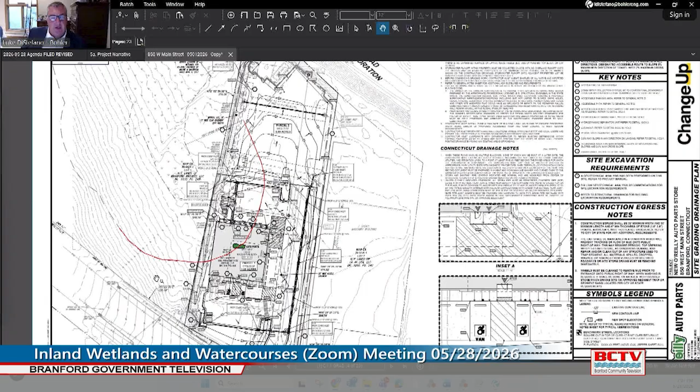That's helpful, thank you. You're welcome. So the back half will be ultimately redeveloped at a later date, but right now we're here because a portion of the site lies within the 100-foot upland buffer associated with some wetlands located in the northwest corner. You can see we have the wetlands identified here, and the red line is the portion of the site that sits within the 100-foot upland buffer. The site, as I mentioned, is basically 100% developed today. There is also a cell tower located in the back portion of the site, that's existing. We're not proposing any modifications to the cell tower located in this portion of the site.

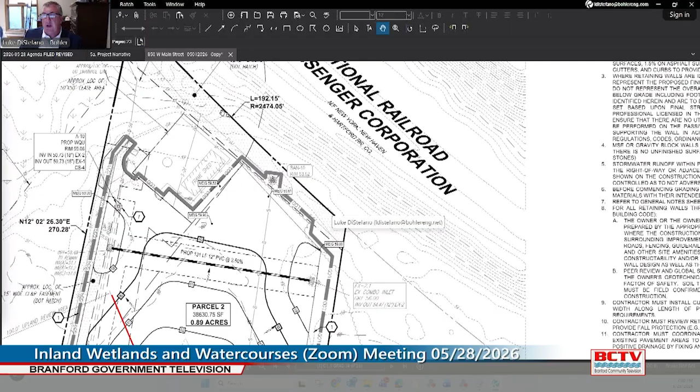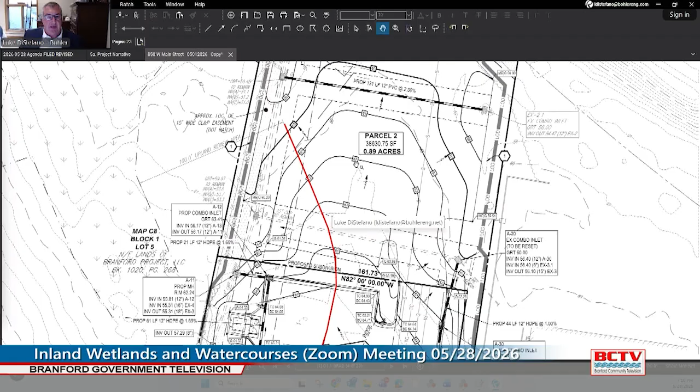As part of this plan, if you've had an opportunity to review the application, we feel we're making improvements to the site that will enhance the wetland under the post-developed condition. We're increasing green space overall when you compare existing and proposed impervious cover. There'll be an overall increase in green space. Most importantly, we're enhancing the stormwater management system on the property. Right now there's a little bit of stormwater quality and management happening, but we're collecting runoff from all impervious portions of the property via deep sump catch basins, conveyed to a proprietary stormwater quality unit before ultimately being discharged back to the wetland, similar to how it is under the existing condition. We've done soil testing and identified D-type soils, so the soils on the site aren't conducive to any type of real infiltration, but we are looking to improve the site to the greatest extent possible.

Again, we're in front of this commission because we are doing work, about 18,000 square feet of work on the 2-acre site will occur within the 100-foot buffer, and that is why we're in front of the commission this evening. So with that, I know you guys have a pretty full agenda, I'll open it up to comments from the commission. We did receive some comments earlier from town staff, none of which we think are major or insurmountable. We also have a meeting set up with the Planning and Zoning Commission happening next month, so there are some additional reviews that will take place in connection with the project, but your commission was the first stop.

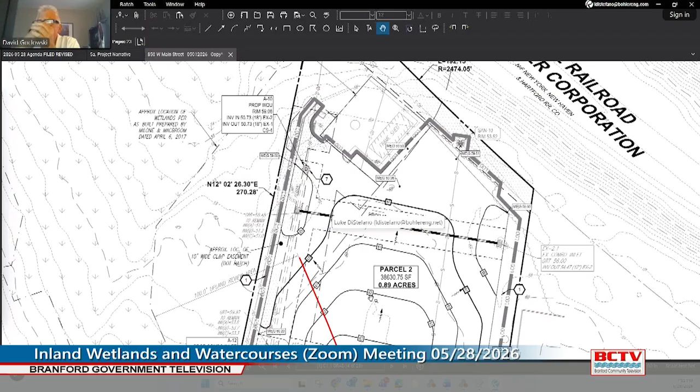Again, I'm certainly happy to answer any questions the commission or anyone on the Zoom call may have. Thank you. Good evening, Mr. DiStefano, Commissioner Goklowski here. I'm under the impression you're going to be removing the existing structure on the property? Correct, everything on site will be, with the exception of the cell tower, razed and removed. Okay, I'm very familiar with the history of this parcel, and there were some sewage issues, piping and sewer issues at one time when they were in operation.

Are you going to be removing the old plumbing that is currently on that structure, or what's the plan? Correct, that'll be removed, new sewer line installed. Okay, all right, thank you. You're welcome.

This is Commissioner Bassermann. Can you go over the construction activities for the removal of the facility that Commissioner Goklowski mentioned, and what protections are going to be employed to protect the wetlands during this removal?

I can't speak specifically to the demolition practices, that's means and methods, but it'll be a typical demolition by a licensed contractor. We have a soil erosion and sediment control plan submitted with the application, so we'll have safeguards in place to prevent sediment migration, erosion, or pollution making its way into the wetland during construction. There's also a long-term operation and maintenance plan for ongoing maintenance once construction is completed and the site's in operation. We're taking all necessary precautions to protect the wetland, and I think we're taking steps to ultimately enhance the overall condition of the offsite wetlands should this construction take place.

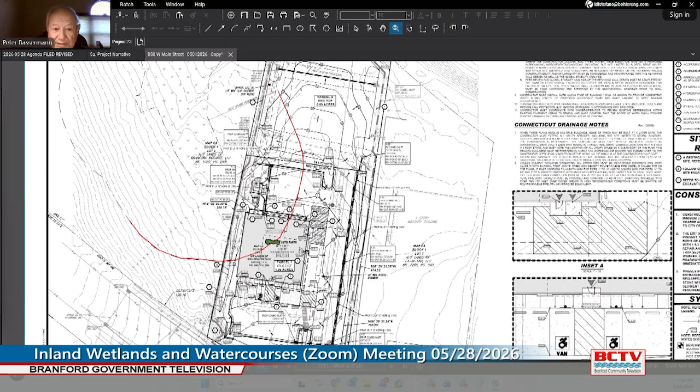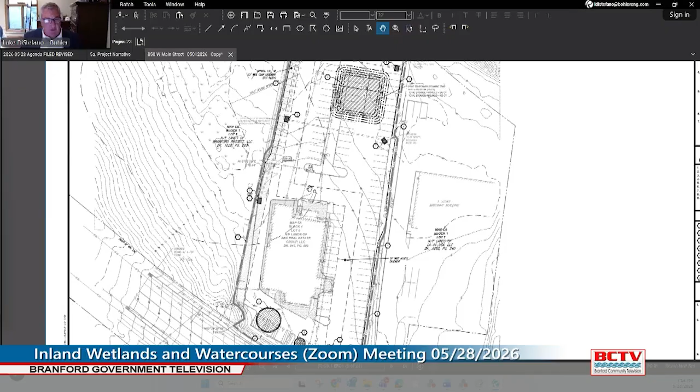I'd like to see those soil and erosion controls in whatever sketch you have of that. So this is the plan here. If you've had an opportunity to review it, you can see we have erosion control barriers around the down gradient portions of the property. We have temporary sediment basins, soil erosion control around the catch basins, and stockpile areas. So it's all the standard soil erosion and sediment control measures we typically employ for any project of this nature.

This is Commissioner Goklowski. You said you're splitting up the property, so what are you going to make it, 3 parcels or 2 parcels? Two parcels. And what are the plans for the second parcel? It'll be developed at some point, but right now I can't speak to that. We're only here for the O'Reilly piece, but my guess is it'll be developed at some point. Do you have any idea what the plans are for that particular piece? I do not at this point.

No. Okay. All right. Jamie, Frederick. Oh, sorry, go ahead, Jamie.

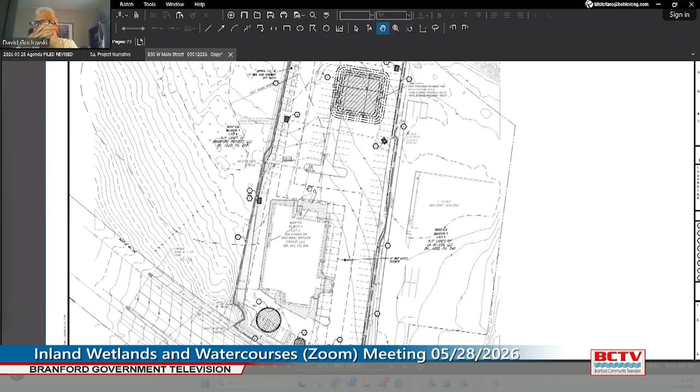That breaks down. So I had a quick follow-up question regarding the rear parcel. I believe as part of this proposal, it's proposed to be crushed stone or gravel, and there will be some catch basins installed in the rear. So I was curious as to what that would look like from a durability of the catch basin frames standpoint, and also from preventing stone from entering the system.

It'll be typical, it's possible that post-construction, if it's left as a gravel-based area prior to being redeveloped, like with any catch basin, there's a possibility of stone, but with the deep sump, 4-foot sumps in the various catch basins, and a long-term operation and maintenance plan as I mentioned, those will be monitored just like any catch basin would on any active site. If it's identified that they're full or collecting any type of debris or sediment, they'll be cleaned as needed. So that's similar to any type of long-term operation and maintenance.

Jamie Frederick, the Wetland Agent, just to follow up on that, I know, just for clarification for the commission, the town engineer did get review comments in on this application that were distributed to the applicant today. I was not able to draft a staff report. Olivia put a lot of legwork into starting one, but I didn't feel it was as comprehensive as I typically like a staff report to be before releasing it to the commission. So I am asking some of my questions on the fly here. But I wanted to backtrack.

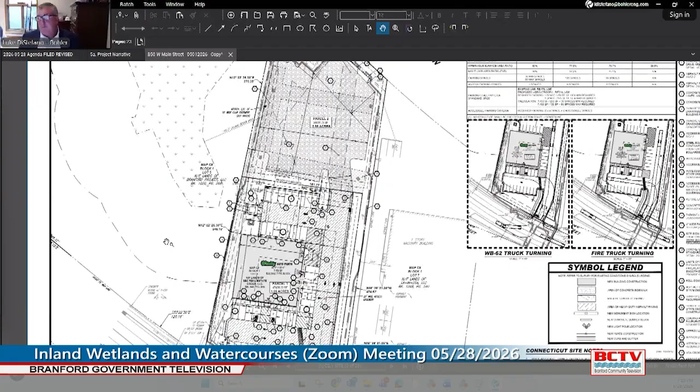I guess I'd like to see that visually. So if it's on this plan, can you blow it up a little more? It is. Again, it's going to be difficult to see. Let me see if I can.

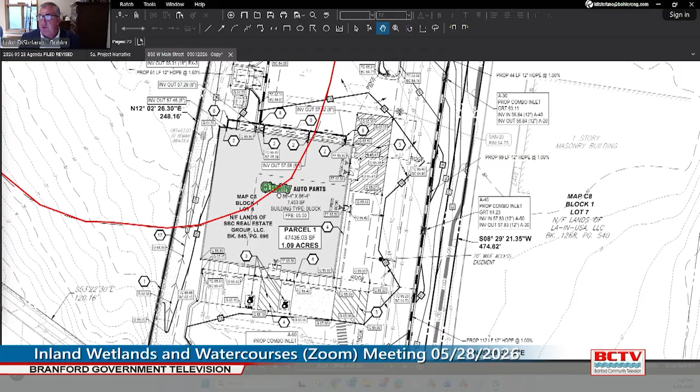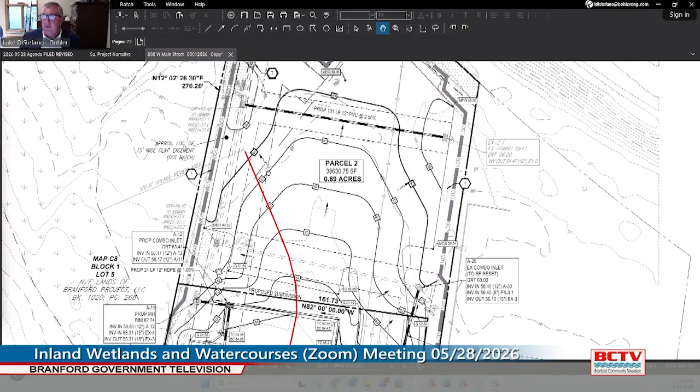We don't always show the actual catch basins, but you can see right here what we've done. This may differ slightly from what's ultimately constructed in the field, but you can see all the runoff from the roof is directed into a series of downspouts on the north side of the building. That'll be collected and conveyed into the stormwater management system here prior to making its way southerly into the water quality unit and then ultimately back into the wetlands. So even though the runoff from the roof is, quote, clean runoff, it'd still be pre-treated like runoff from the other impervious portions of the property will be. So it's another safeguard over the existing condition.

This is Commissioner Bassermann. I'm a little concerned with the comment that what gets done in the field may be different than the plan. All I mean is the roof sometimes changes. The architect may change where the downspouts are on the roof, but we will still collect 100% of the roof runoff and treat it the exact same way. Visually, we're showing it with 4 downspouts on the north side of the building, which we believe to be how it will ultimately be constructed. But it's possible that between now and when they build that building, the roofline could change, the gutter locations may change, but it doesn't change the intent of the stormwater design and how all runoff that hits that roof will ultimately be treated prior to being discharged into the wetland.

This is Commissioner Goklowski again. You said you're going to improve the impervious conditions on the property. What are you going to do with the second parcel? Are you including your plans for the second parcel, or are you just concentrating on the parcel that is going to be developed at this time?

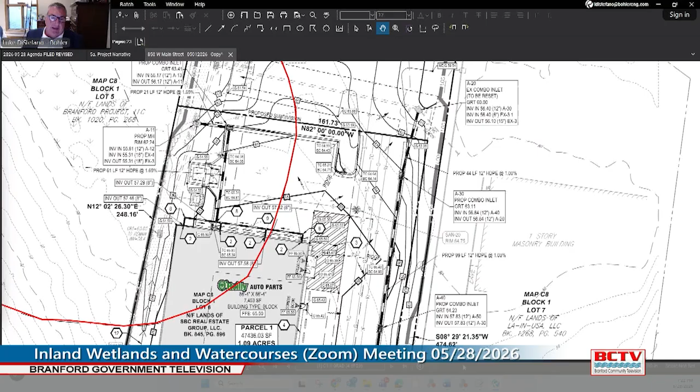Commissioner Bassermann: Is there any stockpiling on the site? I'm sorry, could you repeat that, sir? Is there any stockpiling on the site? Again, we showed some areas on the sediment and erosion control plan for potential stockpile. That's going to be up to the contractor, more of a means and methods thing than anything else. But we did show area for stockpile right here, surrounded by erosion and sediment control fabric, so that if they do stockpile, it's similar to any other construction site. It'll be monitored and done in such a way that it prohibits any type of soil migration or sediment movement offsite.

This is Commissioner Bergman. You're going to take up a lot of old asphalt. Can you speak to where that will be, whether it's going to be stockpiled or brought off immediately, where it'll be stockpiled, et cetera? Again, that's a construction means and methods thing, up to the contractor chosen to demolish the site. In other locations like this, it's taken off-site unless it can be reused as fill or structural fill. Generally that type of material is taken off-site to an approved disposal facility and disposed of according to all federal, state, and local regulations. But again, that's something the contractor will deal with once a contractor is chosen for the project.

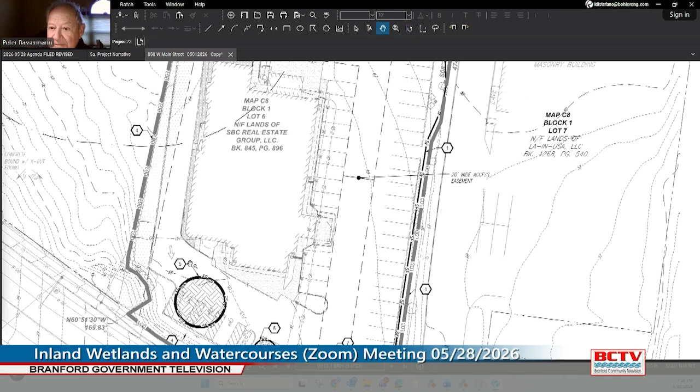This is Commissioner Bassermann. In other applications this commission has reviewed, that degree of specificity has been provided, even though we're operating with the same Connecticut rules and regulations for those contractors. I'd love to be able to speak to other applications and applicants, but I don't know if those applicants had contractors already chosen, or preferred contractors that do all their work. There's a lot of variables.

I've been designing and permitting sites in New England for 31 years, and in 99% of instances, this level of detail on plans is more than enough, whether it be inland wetlands, or planning and zoning boards of appeal. We're not looking to dodge the question. I'm just telling you at this point in time we don't have that information, but we're happy to provide it when we can.

Jamie Frederick, the wetland agent: I'll speak to that point. I think the main concern the commission has relative to stockpiling is the extent of stockpiling on site. Oftentimes plans will initially come with a small circle, and then the site development comes and it's a much larger stockpiling area. So the main concern is whether the stockpiling area is appropriate for what's likely to be stockpiled on site. The other question is whether asphalt millings will be stored on site, because oftentimes the commission will want to see that covered to help reduce leaching of chemicals from the increased surface area of the millings.

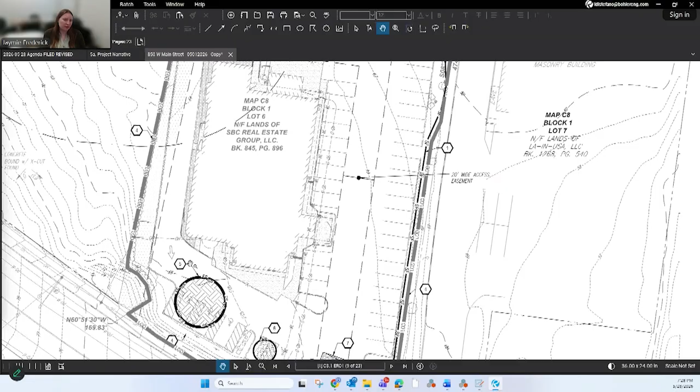The main thing for consideration is making sure the stockpile doesn't move in proximity from where it was proposed on the site plan to the wetland, and that we don't end up with stockpiles on top of catch basins, which ultimately drain into a stormwater system that goes to a wetland area. So those are the concerns the commission's looking to address.

My computer's not behaving here, but I can tell you when we lay these things out, we put the stockpile as far away from the wetland buffer as we could. We also have to remember this is a very small property being redeveloped. It's currently 100% developed today. We are not modifying grading and drainage to any great extent, so we don't anticipate huge stockpile areas on site.

This isn't an undeveloped site where we're coming in and cutting into huge slopes. We also have a site that's very tight for everything that's going to be happening. When you consider there's going to be construction equipment, they're putting in a building, there's not a lot of room to maneuver. So we placed the soil stockpile area where, in our opinion, it's as far away from the wetlands as it can be, and in an area conducive for the contractor so it doesn't interfere with other construction activities or equipment on site.

But again, we're certainly happy if there are certain requirements the commission would like to see, such as some type of material underneath any stockpile, or additional provisions beyond what we already show on the soil erosion and sediment control plan. We are more than agreeable to having those added to any type of condition or decision the commission sees fit to offer this evening or at any appropriate point.

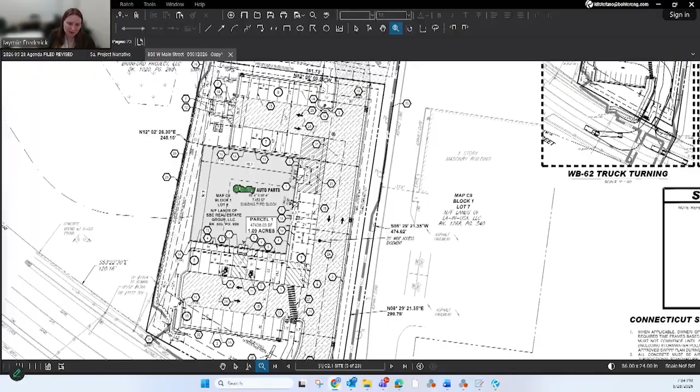So, this is Commissioner Bassermann. It sounds like it's not ready for prime time at this point. It needs to be reviewed both by wetlands and by planning and zoning, and you're kind of wearing both hats these days. So I'm going to make a motion that we table 26-16. Before you do that, Peter - yes, can I interrupt you and stop you? I just want to point one thing out and see if any commissioners have other questions, so that if we continue this, hopefully everything is ready to go at the next meeting and the applicant can move forward and not be held up. I want to point out a couple things, and also give the applicant a moment to address any follow-ups before we continue.

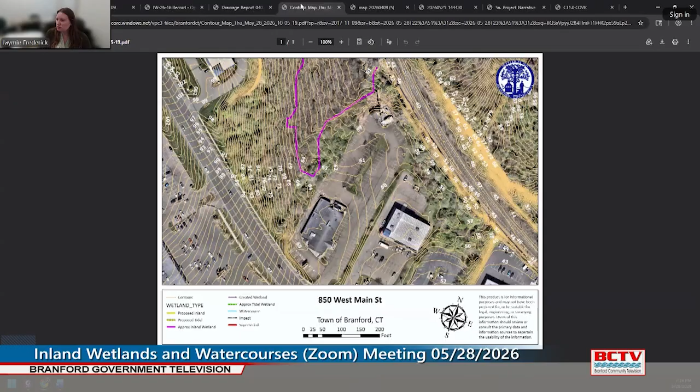It does look like the wetland might be a little bit more extensive. Again, it appears to be mostly offsite. I'm not entirely sure if there's a little bit of wetland area that perhaps extends onto the subject site. Presence of phragmites is not a wetland indicator, but the plant does tend to grow in wet areas.

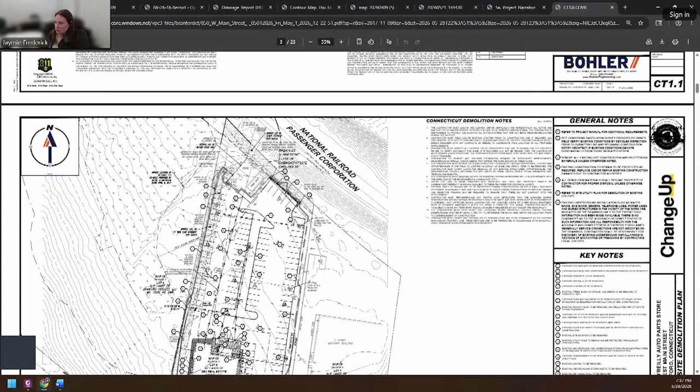Commissioner Besson: Jamie, that last picture, how close is that offsite area to the property line? Jamie: Honestly, I'm not entirely sure. But this catch basin here... Commissioner: is this catch basin here? Jamie: Oh, okay.

I will note that when I was out there, there's a very small portion of this lawn that seems like it would be graded to potentially flow to this catch basin, and the rest of it is graded away from the subject site. That's shown in the watershed calculations.

Any questions on any of that from commissioners?

Commissioner Bassermann: Would it be your intent, Jamie, to put those questions and comments into a document and forward it to the applicant so it can be reviewed for the next meeting? Jamie: Certainly, we'll follow up with the applicant. I'd also like to provide them the opportunity to see if they have any comments or questions while we're all together.

Commissioner Begman: I like the idea of the project coming back when the contractor is known, so we can be told what the erosion and sediment controls specifically would be. And I had a question: is there a provision for where in the paved parking areas the snow removal will go, and where the snow piles are going to be piled?

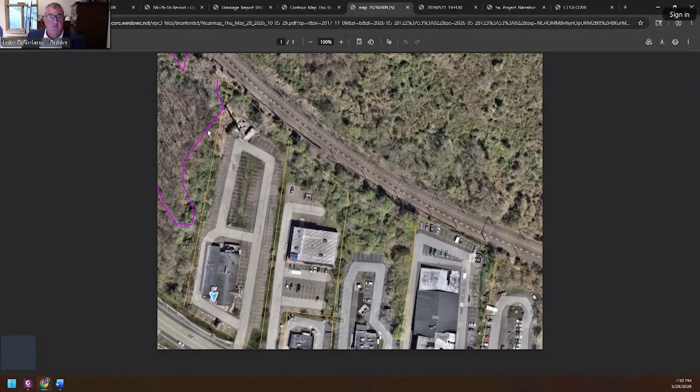It's a question for the applicant. I believe the snow storage areas were shown on site, but I'll make certain that when we come back they will be, if they are not. Generally they'll be in landscaped areas as far removed from the wetland as we can.

I can't guarantee that unless it's a specific requirement by the commission that there be no snow storage within the buffer, in which case we'd keep it entirely outside. But generally it's going to be in landscaped portions of the property around the perimeter. In instances with tighter sites like this, if the commission deemed fit, we have in the past agreed to have snow removed entirely from properties during heavier storm events, but traditionally we're able to find plenty of room to mitigate snow and keep the site operational.

I would, however, ask about the comment you made relative to coming back once a contractor is chosen. I'd prefer not to have that as a condition because we don't know when a contractor will be chosen, depending on permitting and funding timelines. But despite a contractor being chosen, if there are specific issues the commission wants to see, or specific items put on a plan or conditions in any approval, we're happy to deal with that. It's not something we're looking to shy away from, it's just something I can't provide right now.

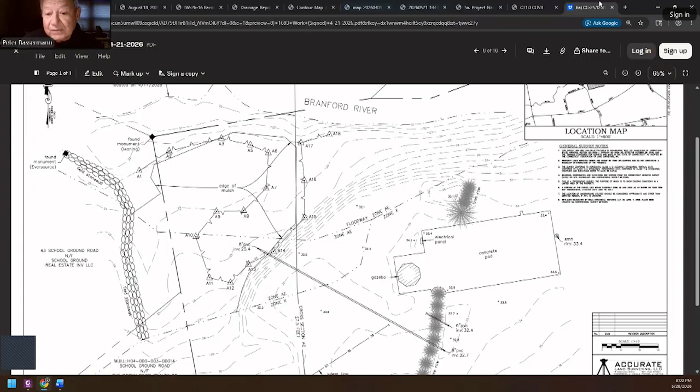Good evening, Edward Schenkel for the applicant, 509 Branford LLC. I'm here with Mr. Stephen Trinkus, our professional engineer, and Mr. Foss, our LEP, also here and available for questions.

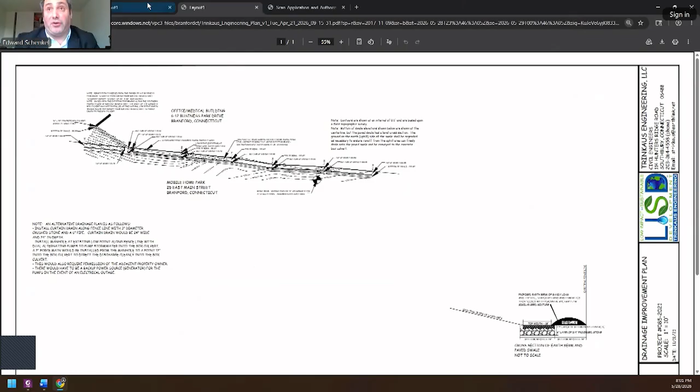I'll speak quickly and then turn it over to Mr. Trinkus. I can represent that I've spoken to Attorney Deacon, counsel for the co-applicant, 6-12 Business Park Drive, Branford. He stated that Mr. Brown and Mr. Clutch are not pursuing the concerns they raised before and will not be attending the meeting tonight, which they are not. I can represent that to the commission. To the extent Mr. Brown's comments need to be addressed, I'll turn it over to Mr. Trinkus, who can talk about that and answer other questions for the commission, and then I'd like a few closing remarks as well.

Sounds like a plan. Okay. Steve Trinkus, for the record, professional engineer from Southbury.

A lot of Mr. Brown's comments dealt with the stuff on the Clutch property. He asked at the meeting whether we could infiltrate water farther up on the site. Our LEP provided a map to staff showing the extent of the impermeable liner above the questionable environmental fill that was used here. But you just can't infiltrate on this site, even above the liner, which goes about halfway up into that field.

When we did the site walk, we parked on the lower driveway, and looking uphill at that lawn area, the liner appears to go about halfway up between the roadway and the units on the north side. But even if water infiltrated above that, it would go underneath the liner and into that contaminated fill, which is what you don't want.

When I was on the site a couple of years ago, these lawn areas, while they are lawn, the soils are also very compact — pretty much almost one step away from being pavement, so rainfall just runs off of them. It's not infiltrating.

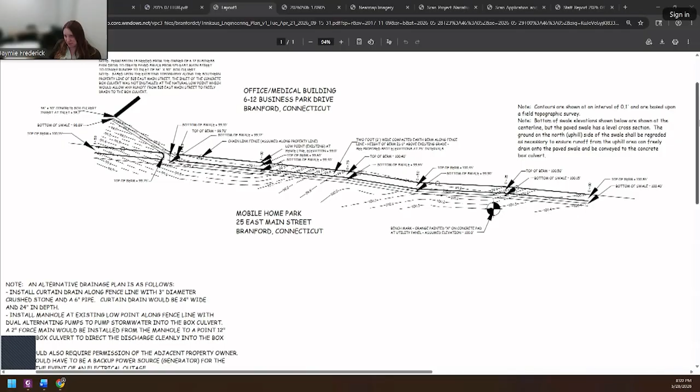Jaymie Frederick, the Wetland agent. I think we could address that through a condition of approval, potentially, especially since we got a verbal response. We could get something written and added to the plan.

Sorry, someone, I think Mr. Trinkus is getting frozen periodically. Would want to, but I apologize, I guess my computer's not happy being on all day.

But the maintenance would be basically mowing it twice a year, about midsummer and then late October. Not mowing it, but weed whacking it. So anything that grows up like a foot, just weed whacking it down to about 6 inches, and that can easily be added to the plan as a condition of approval. But that's the only maintenance we'd have to do.

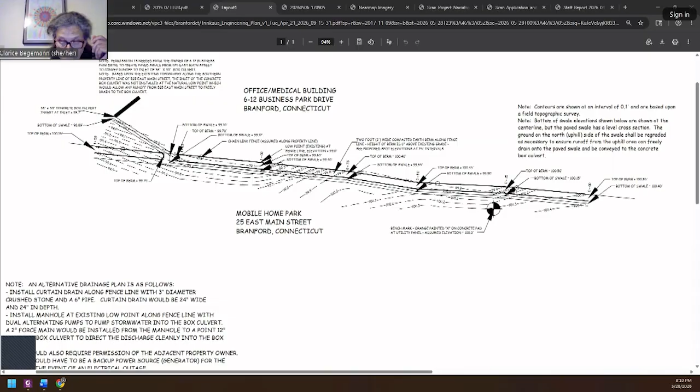Jaymie, this is Commissioner Begemann, do you have a staff report for this?

I believe we went over the staff report at a previous meeting and continued for the site walk, so I'll skip over that. I think the other thing of note is the erosion controls and how they'll protect the box culvert during the construction of the swale and associated berm.

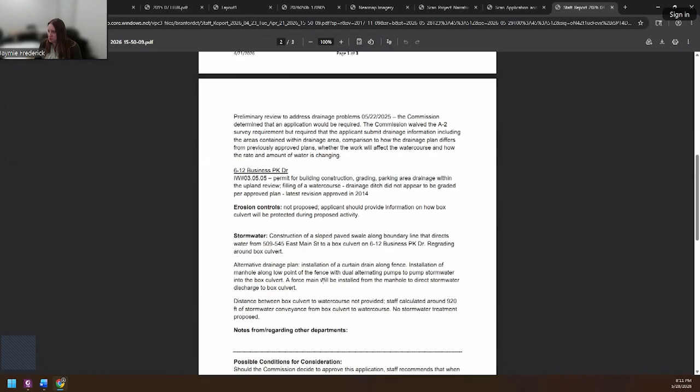The outlined recommendations in the staff report are required inspections for the stormwater drainage structure installation and final installation, or final inspection, which probably happen at the same time, standard conditions and general provisions in the issuance of all permits. I think based on the discussion this evening, the commission might want to also add a condition such as maintenance details as outlined at the May 28, 2026 meeting by the project engineer shall be added to the site plan.

And I don't know if you want to have the engineer talk to it. I know there was some discussion at the last meeting where this was discussed, but again, refresh the commission on how the box culvert will be protected, if there are any measures that should be installed, and what that would look like relative to the plan as well.

This is Commissioner Bassermann, who does that maintenance? Who does that weed whacking? The maintenance would be done by the property owner.

And if I can address the erosion control, I thought we may have discussed it on the field. We'll put a 9-inch Filtrexx sock across the opening of the box culvert, right at that opening, so that as we do the slight excavation, put the gravel in. Because what will happen is we're going to excavate down for the gravel base, put the gravel in, get it sloped to the box culvert, and then come in and pave it, and then the berm goes in right after that. But we can put a 9-inch Filtrexx compost sock across the opening, and that will prevent any sediment from getting into the box culvert when we do this slight amount of work.

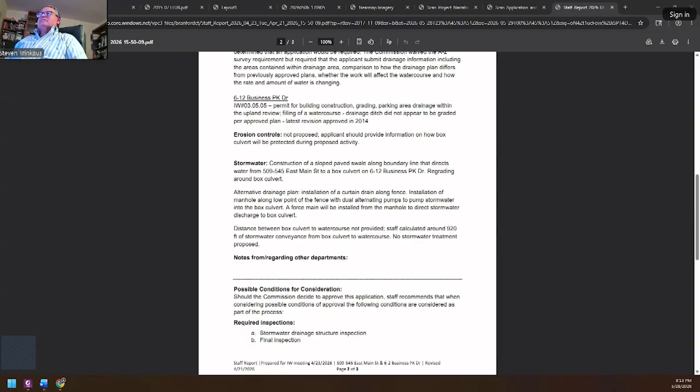This is Commissioner Bassermann. Jamie, do you have the means to add that to this staff report, or is that not capable because it's a different system? It'd be easier for me to have a Word document with the language that we can add to the staff report. I am working on it right now, I think it's almost ready.

Maintenance details as outlined at the May 28th, 2026 meeting, and a 9-inch Filtrexx sock shall be added to the plan at the opening of the culvert.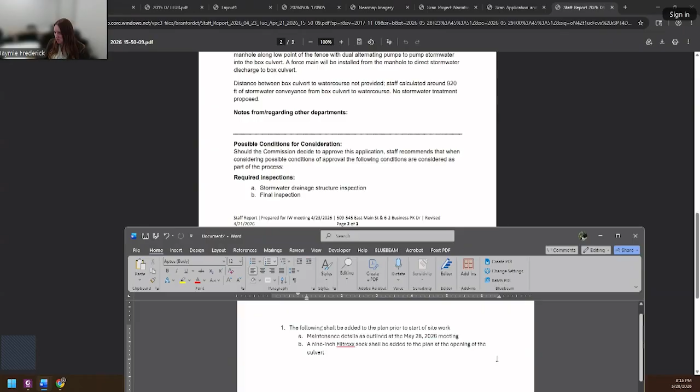So this would be essentially condition number 1, and I can kind of overlay it over the standard conditions that the commission's generally familiar with. I think I spelled the brand name right. I think that covers it, Jaymie.

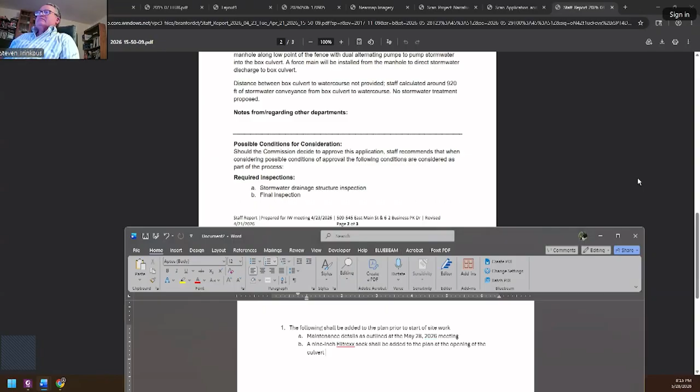This is Commissioner Besserman. So Jaymie, so I understand that this would be under possible conditions for consideration number 1, and then required inspections would be number 2 or something? You know what? Typically, I think based on Olivia, maybe you can help me on this one. I think required inspections might be condition 1 in our new system based on our template. So maybe this would be condition number 2. Do you recall, Olivia, how it's structured?

I think maintenance would be number 1, and then the Filtrexx would be number 2. I mean, do we count the required inspections as a condition? No, okay, unless, no, but I don't know if the commission wants to see a revised version.

Prior to start work and following shall be added to the plan and shall be reviewed and approved by the duly authorized agent. I think that's the information that was presented this evening, so it's just a matter of making sure that it's in order. Sometimes we need an erosion control inspection. I didn't put it there when I was initially drafting it because there were none proposed, so I'm not sure if we want to add that.

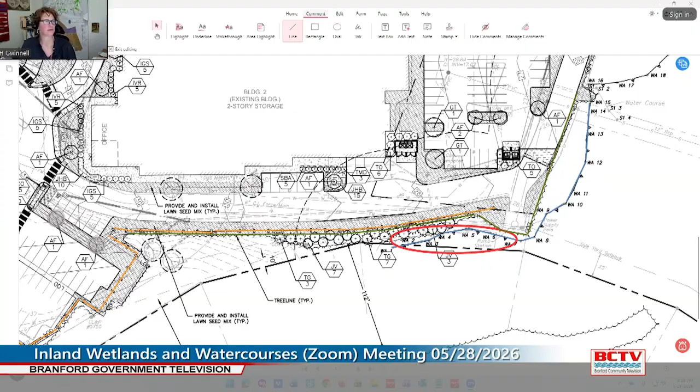Let's see if I can. I'll share my screen. Okay. I'm not great at the screen sharing, but can everybody see this? Yes. Okay, so there was some discussion that some trees needed to be cleared.

Jaymie had conversations with the project manager at the time that the trees would be limbed, and I specifically asked when do you guys have that planned? This was during the winter time, there was still snow on the ground. They were not ready to schedule it at that time. However, I was informed that they would reach out and give me a heads up so I could go and just see the area that they were actually going to clear.

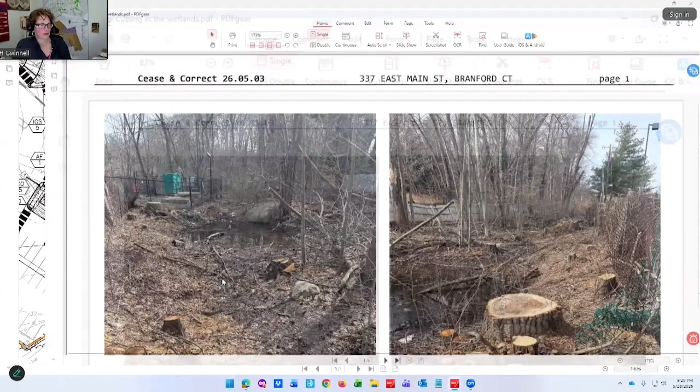Probably a few weeks after that, I hadn't heard anything. I was, again, doing a routine inspection, and when I arrived, this entire area was not just limbed, it had been cleared. So I do have some pictures - this is what I saw when I went after.

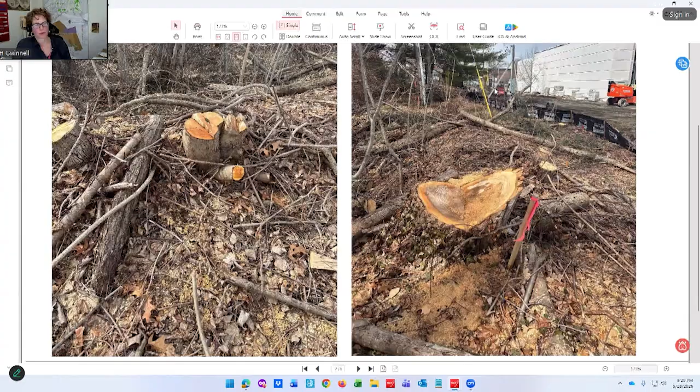This is where the trees had been that we were informed would be limbed. This was the result, and it obviously went deep into the wetland area.

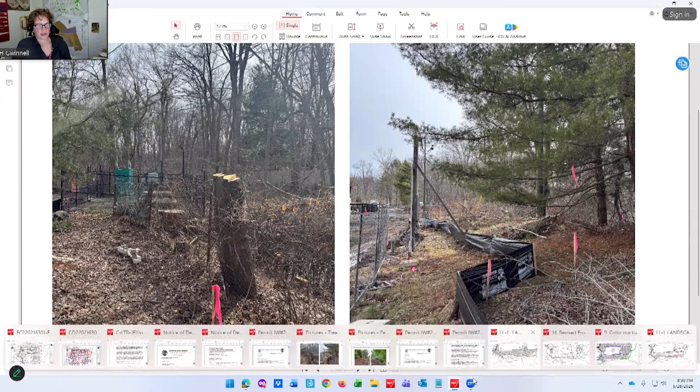I did have conversations with the superintendent on site, the previous one they switched out, the new one, and the different project managers. So everyone was aware that this was something that was going to have to be addressed, and that they would be receiving some kind of a cease and correct order in order to remedy this. The follow-up, what you're seeing now, is slightly different than the previous one.

I think if you can see this, we have the orange line, which is actually a fence. And in the last 4 days, the fence has moved, or has been beginning to be installed. Again, there was a conversation before this sort of went in, saying, why are we putting the fence over here?

So I also would like to bring up to the commission that during this discussion of the wetland area, they also altered the direction of the fence, which you can see pictures of here.

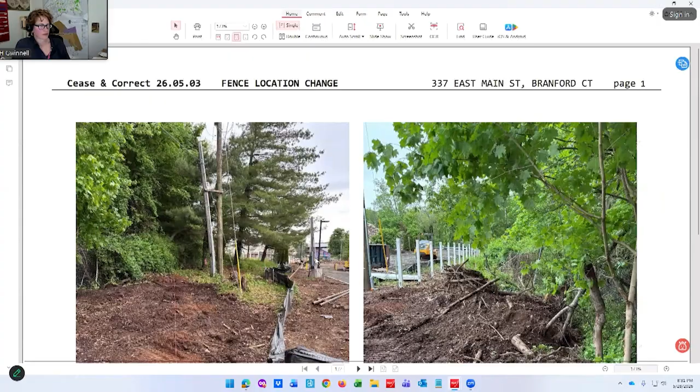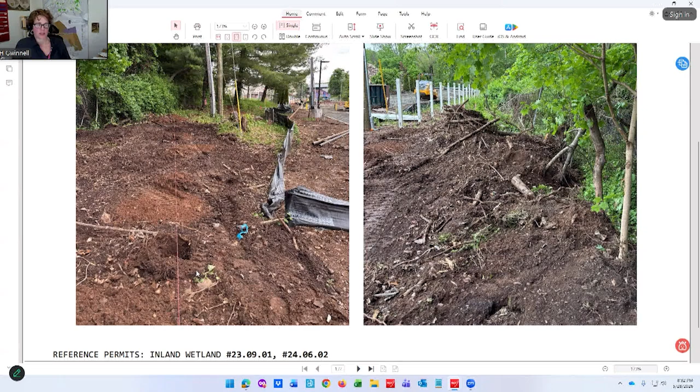So if you can see this pink line, this is from when I went last week, Thursday afternoon, and this had all been cleared back to here. And you can see over here, some of the fence posts had been put in. They were concrete. I did inform them to stop what they were doing, that this had not been requested, no modification had been requested. This plan had not been submitted to install the fence in that configuration.

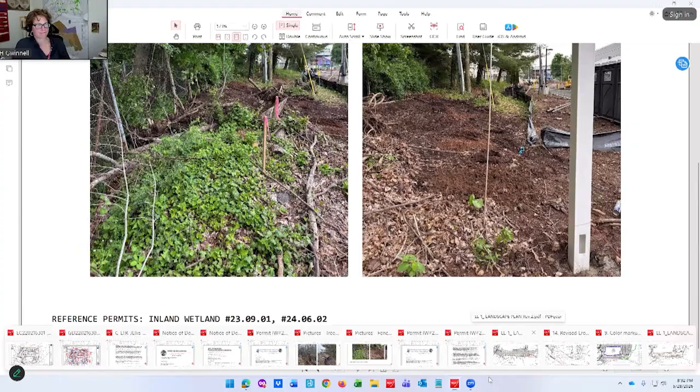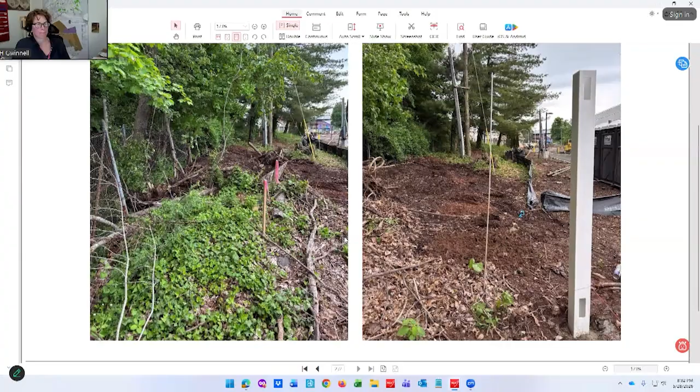Commissioner Basserman: go back to the previous set of pictures. The clearing or the trees? The fence that you had up, the white fence on the right? Yep, the one before this. There you go. But were those posts put in after the issuance of the cease and correct?

No. Because the cease and correct was issued on what, the 3rd? Two days ago. So I had communicated with them that Thursday afternoon that they needed to stop. I had been, last week, in training, so I was not available. I stopped by here on my way home because I know that the site has a lot of activity and we had a tremendous amount of rain. I informed them to stop what they were doing with the fence.

Since then, in this area, the posts had been put in and concrete had been poured around the bases, and some of the paneling, if you can see way back here, you see some of these white posts in the back, the fence has been installed on those. I was there yesterday afternoon, and these posts are now in, but I didn't see any fence paneling up.

Can you go back to this, Commissioner Basserman, can you go back to that site plan that you started with? The original one, this is the current one. I guess I'm looking for where the wetland is, where the delineation is on the wetland.

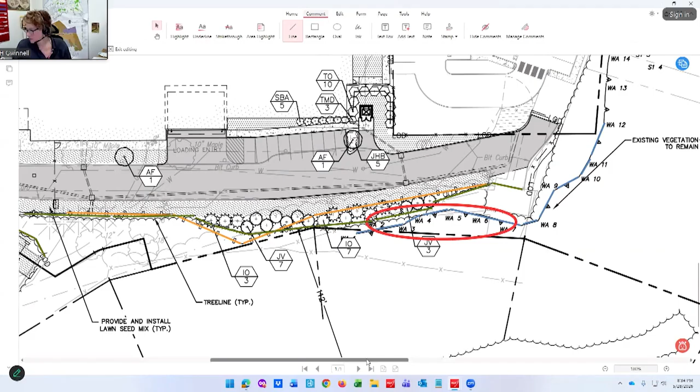Sure. Well, this has not changed. This wetland line has been the same since this was the plan that was approved in the original permit, and this is the landscaping plan that the landscaper actually was working off of, which only came into existence, I believe - I can look at the date - that was February, January of this year, versus the initial permit which was issued in 2024.

Commissioner Basserman: is it wetland 2 that's at the end of that red circle? Yes, that's wetland 2. And wetland 1 is here. Okay, wetland 2 is over here. And it just abruptly stops?

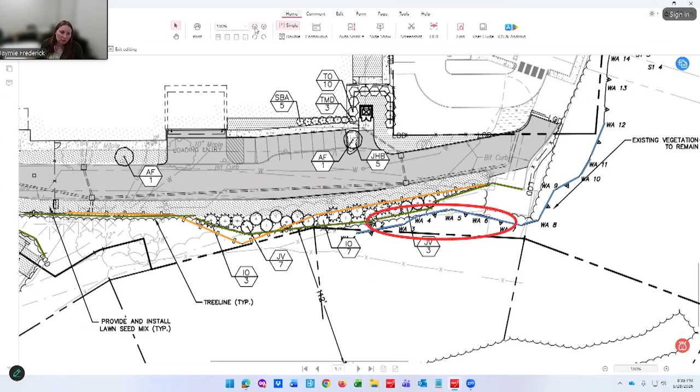I am not the wetland scientist. This is Jaymie Frederick. The wetland agent - that's the property line right there, so it's typical for wetland lines not to extend beyond the property limits. Say that again, Jaymie. I'm sorry, I didn't hear. That's the property line, so wetland flag 1, the call out for that is actually on a different property, so that's why the wetland line ends there. Oh, okay. All right, thank you.

It's kind of a mess. Yeah.

Do you have any recommendations at this point about how you feel we should proceed? Well, I think that there are representatives of the assorted parties on the call. And we had discussed previously that some kind of a restoration plan would probably be requested from the commission for the area that was cleared. Beyond assuming that and telling them, I haven't really given them any further information because I'm not sure what the commission wanted, what direction they wanted to take.

I would like to hear more information about the fence and why it was moved past the limits of disturbance and what the rationale was. But as far as further recommendations, I have to honestly leave that up to the commission because I don't know what you guys would imagine was the right course of action. Well, Commissioner Basserman, you said that there's folk on the call that can address this, so let's turn it over to them and hear what their comments would be.

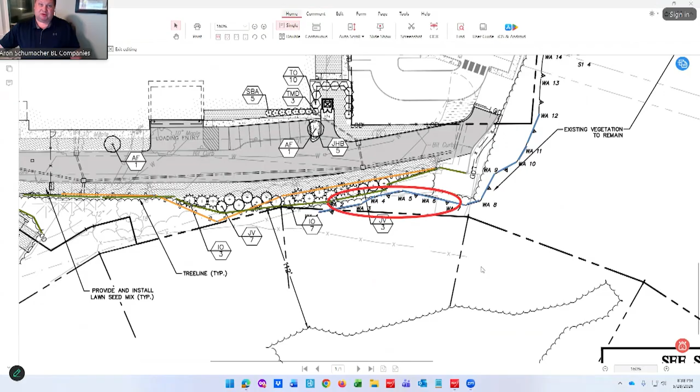If it's okay, I'd like to share some plans that we've highlighted. There are plans that have already been submitted to you; I just highlighted them. I can send them to you after the meeting as well.

I also forgot to mention on the call tonight is Jay Tillman, a representative of the owner, Premier Self Storage, and Mike Butcher, who's the general contractor on the job. If you have questions for them, they can chime in.

This is the original landscaping plan that was approved by the commission. The things I highlighted are the wetlands areas, shown here in blue. The yellow highlight is the approved limits of clearing. The green highlight is the proposed landscaping along this edge of the driveway, consisting of American holly and eastern red cedars. The IOs are the American holly and the JVs are the eastern red cedars. This line that falls off the edge of the pavement is the original location of the approved fencing that was discussed earlier.

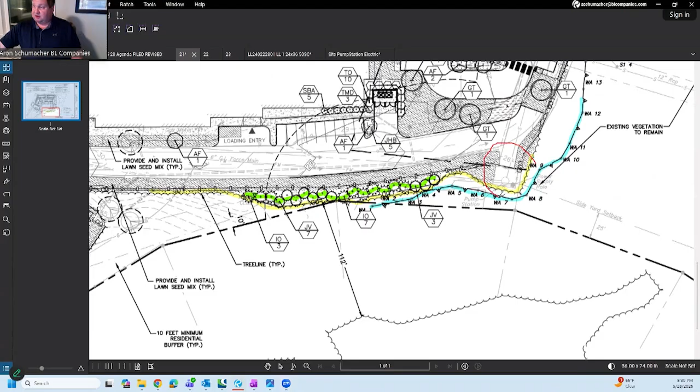So what happened throughout this project involved getting power to the building and working with Eversource. After we got approved through you, we went through planning and zoning, and then to Eversource to get their approval on how we'd bring power into the building. They have a line that runs to the back of this building that serves the municipal pump station. If you're familiar with the site, this area is the Town of Branford's sewer pump station, and there's power that feeds it from an existing line that runs through and basically clips the wetland.

As we were working with Eversource to feed the building, it became their request, and the plan developed, to set another utility pole—this pink circle—in the rear of the property, which would receive power from this existing pole, the yellow circle, and feed the building. These green lines are the existing power lines that have been there for some time prior to the start of our project. This line runs through here to this yellow pole, through the area that was cleared near the wetlands, and feeds the pump station.

The request of Eversource had two parts. One was to clear their line for maintenance purposes—clear their 10 feet along the power line—to continue serving the existing pump station with a reliable power supply. The other was that they would be able to access the poles from inside our fence. That's the rationale behind moving the fence. The original fence was this orange line, and it was relocated on our plans to allow Eversource access to their equipment and poles to continue maintenance.

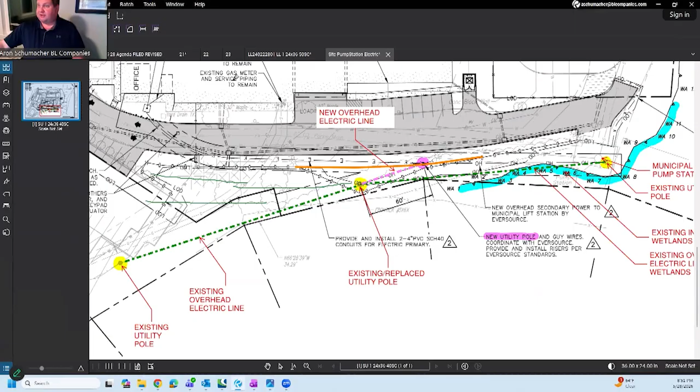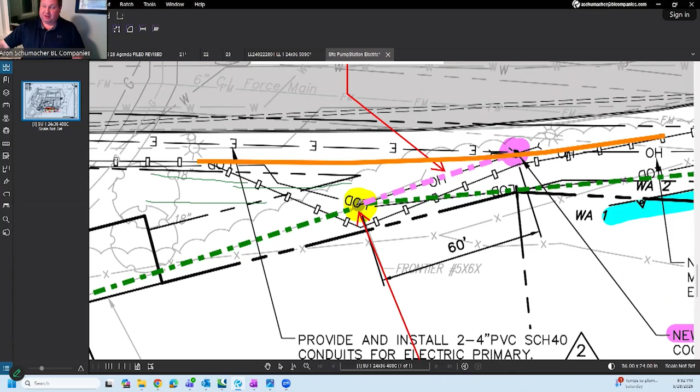So if we look at the original plan, you have your tree clearing and your limit of disturbance, that was approved as this line here. This is the fence line and this is the limit, so it's within a couple feet basically. That's nowhere near the wetlands, is it? That's further up, that's near. So this is the existing pole, and the reason we put the fence is basically to go behind the existing pole, set just behind it to give Eversource their access that they asked for.

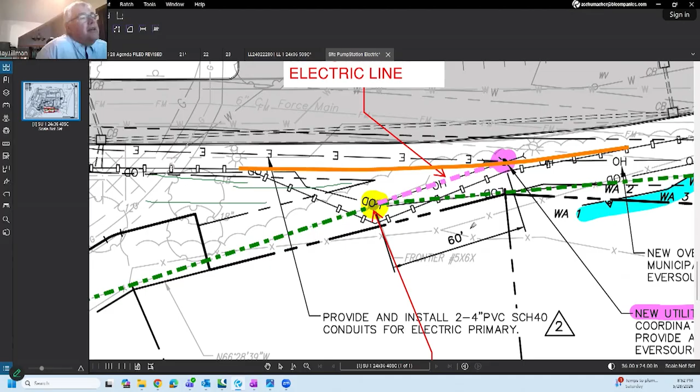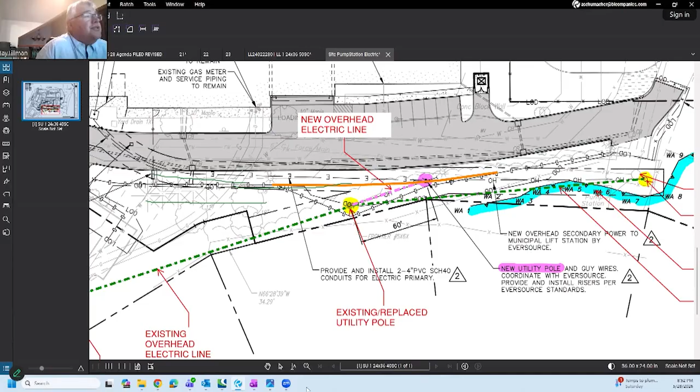Correct. I'd like to let the board know that we didn't remove these trees because we wanted to. It didn't improve our visibility, it didn't do anything for us. As a matter of fact, we had to pay to trim these trees for Eversource. I'd also like to point out that the movie theater received their power on the other side of the building, and we designed our project to also receive power over there. The fact that Eversource changed their mind after all the planning and approvals that had been sought is beyond our control. It ended up costing our company a change order of over $75,000 because Eversource changed their mind on how they were going to provide power to this building. So it wasn't anything that caused us to profit. If anything, it's cost us a lot of money and a lot of time, and it's certainly not anything we did intentionally.

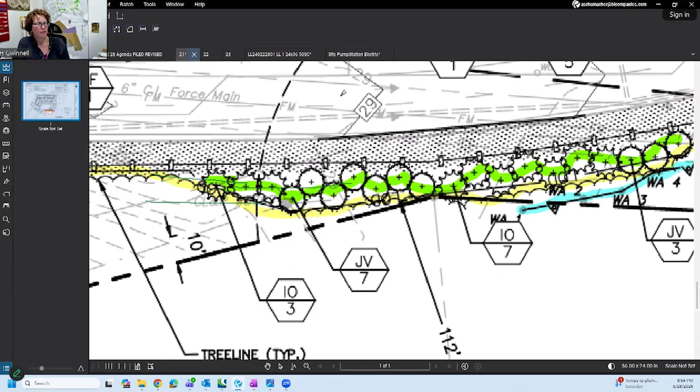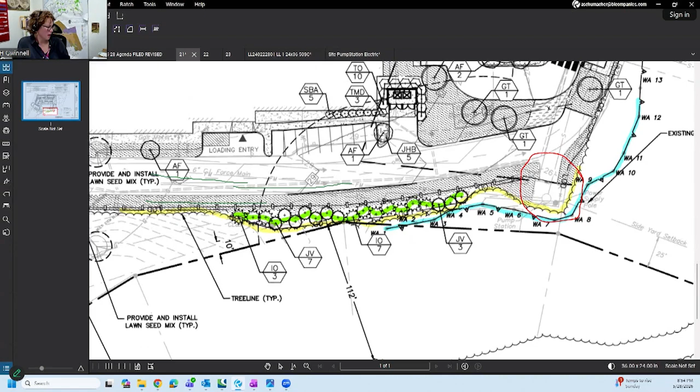Heather Gwinnell, wetlands officer: when you're thinking about what the landscaping restoration might look like, Aaron, you're sharing your screen now. I don't know if you can put up the landscaping one. Because in this particular one, this is the original one that was approved, the one that was sent to me, and that is the updated version 2.

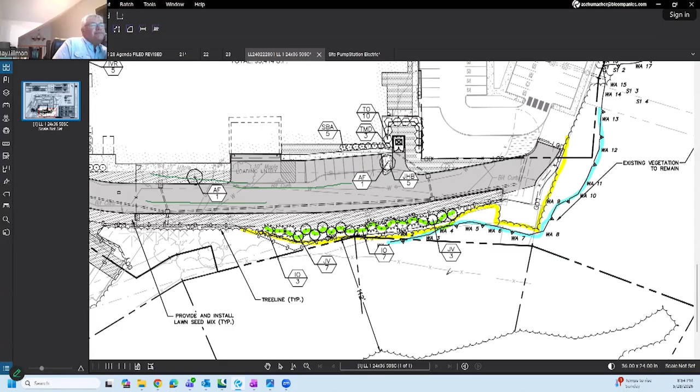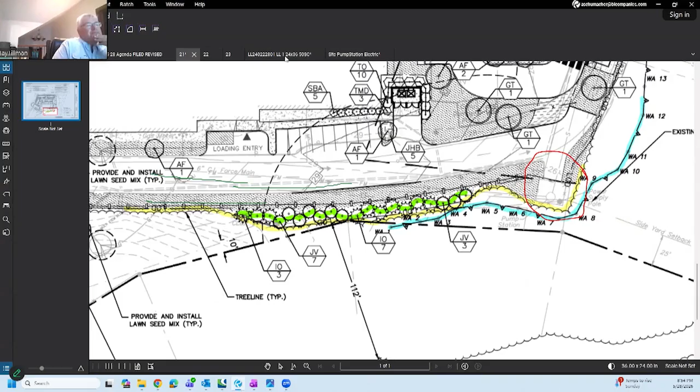Right, those plants appear to be behind the fence. Are you actually putting those plants behind the fence? And if so, that's an interesting plant choice. These plants have not moved, right? So on the original planting plan, these plants were all planted behind the fence to enhance the wetland buffer. So the change is that a series of them are behind the fence, on the wetland side, and then the fence is going to swap sides with them in order to incorporate that Eversource pole. I'm not sure there's a lot of area left over here for us to do additional plantings, because we already have these plantings proposed as part of the original approval.

Jamie Frederick, the wetland agent: relative to the change in limit of disturbance relative to the new pole, there's not much to do. My question would be relative to the clearing that happened in the wetlands, there's no plantings proposed in that area. Has the location of the clearing been identified to any extent relative to the wetland and the property boundaries? As in field located by a survey crew? No, but this line here is the power line, so it's 10 feet either side of that. So my main concern would be like from wetland flag 6 to 2, that 10-foot offset.

It might be, and I know BL has environmental professionals including wetland scientists, that there's enough there, but I think having some sort of analysis done to see whether there's anything that should be planted to restore some sort of shade canopy to that wetland area. I do know the stumps were left in place, which was a good call for maintaining ground stability. But I think the commission would want to see some sort of assessment at the very least, and possibly a supplemental planting plan, with an understanding that there are limitations based on the power lines, particularly the older power lines that are low, to offset that activity. It's understood that it's not something the applicant was particularly seeking to do so much as directed to do, but it's still activity in and adjacent to a wetland, and this is activity that this commission would generally review.

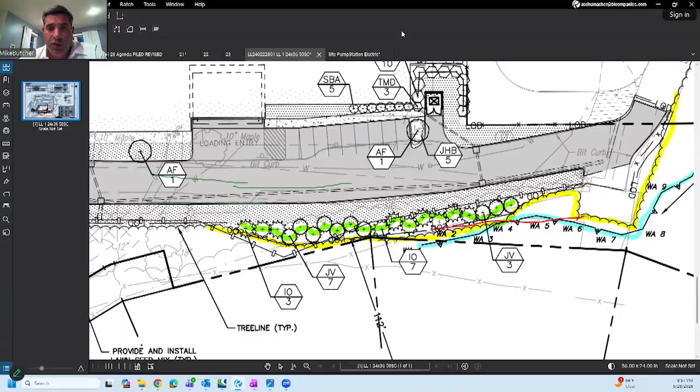If it helps, I can steal Aaron's screen real fast and show you a couple of pictures of right after the clearing, while the stakes are still in the ground, showing the limits of the wetlands and where our LOD is, just to show you it's not as bad as some of the pictures look as far as how far into the wetlands the clearing goes. I can pop a couple of pictures quick if that will help. Sure, if you could email them over afterwards too. I can, yes. Let me share my screen here.

If you can see my screen now. I think it's still loading. It's thinking about it. There we go.

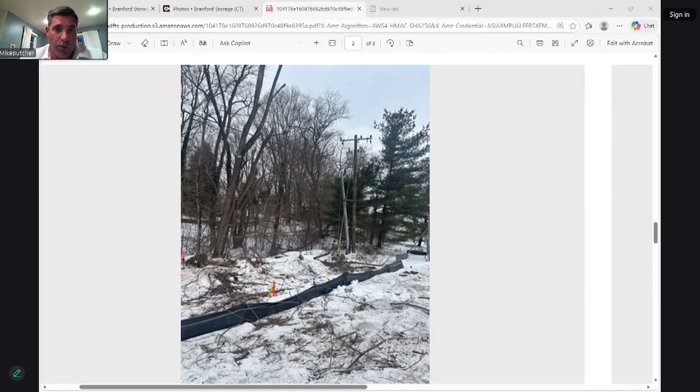So, a couple other pictures, you can see the area. These trees here are some of the trees that were taken back. This is the new wire for our new feed, comes from this, our temporary pole. The new pole's in the same location, and that wire comes kind of straight through and across. So these couple trees here, in order for that wire to go in just 10 foot out, they had to come down. That's kind of the condition of what it was when the clearing happened.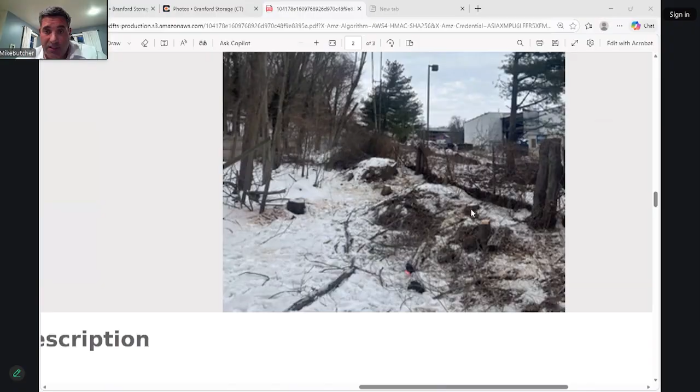Here's just another shot straight down the line, so you can see where those trees run. Everything to the left towards the wetlands, we did our best to just limb those back to what Eversource would allow us to do. And then the trees over here that fall directly under the new pole, kind of back outside of the wetlands area, right on the edge of our limited disturbance, is where some of those trees just had to come down. They did the best they could to leave stumps and limit any ground disturbance in there.

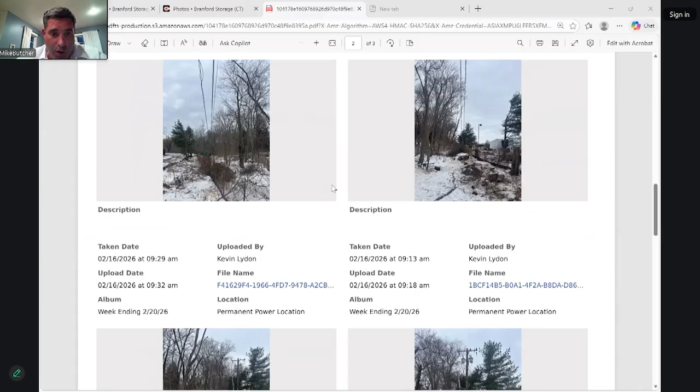Like the previous photo showed, so close to the silt fence, those trees that came down right there - yep, that's also not in the wetlands. Correct, yep. And that's why in this photo here I was just trying to show the line of the wetlands coming through here.

So I just wanted to, I'll email those over to you as well, Jaymie, but I wanted to share those so you can kind of see and understand the situation out there. We did the best we could with Eversource.

Any thoughts from commissioners now that you've received a lot of information?

I think this, Commissioner Basserman, I guess, is the area now prone for invasive species to take over the area that was cleared? That would be one of my concerns.

That's part of why generally the commission looks for some sort of plantings and shading. Planting and shading provides two benefits: one, by planting natives, we have a native vegetative buffer, and planting provides competition for invasives; by having shading, it protects the thermal characteristics of the wetland, and it also helps prevent invasives.

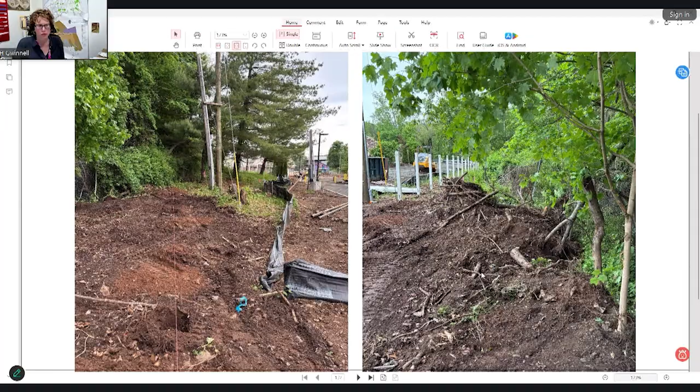Sharing her screen, Heather pointed out the area on the back side where the fence is going to go along that line, showing it's disturbed all the way back. As far as she could tell, there was no specific plan for any plants to go there. She didn't think they were going to sod that area, but noted it's ripe for invasives to move in.

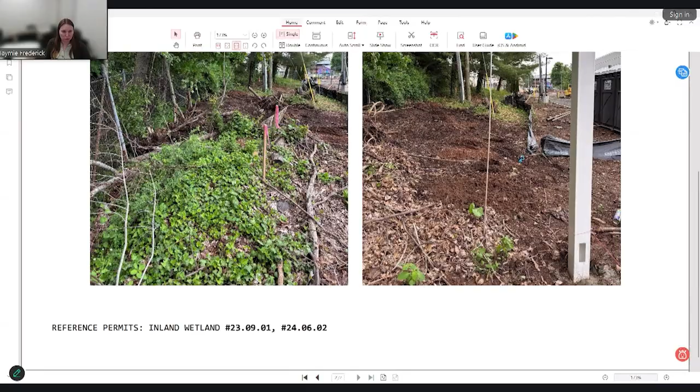She suggested any excess material on the surface should be removed, questioning if those piles from the first pictures are still there. That area should then be seeded. She clarified that's not a pile, just material left there, which she thought was still there, and recommended it be graded out so there's not just a pile of dirt, possibly leaning against trees. She recommended a shade-tolerant conservation seed mix be planted there.

Aaron Schumacher from BL responded that the area in question is where the proposed plantings that were approved are going to go. Heather clarified she meant any disturbed area not part of the plan area, beyond particularly any limits of disturbance, since she's seeing the silt fence on one side and activity on the other - that area should be seeded with the conservation seed mix.

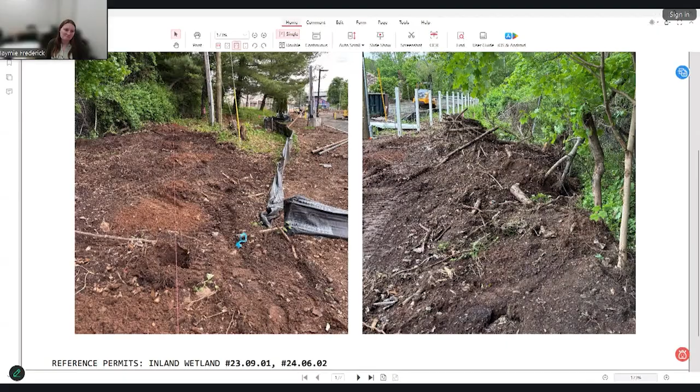Commissioner Basserman said at the next meeting they'll also have a revised site plan showing the new plantings, where they're located, what's going to be sodded with the appropriate conservation mix, the fence line, etc., so they can see the picture as it unfolds.

The chair asked if there was anything else from the commission, then asked Jaymie to confirm he intends to send an email covering what was discussed this evening for this cease and correct matter. Jaymie said he'll request that Heather does that. The chair confirmed they would continue the cease and correct matter 260503 until the June 11th meeting.

The chair moved to agent approvals, asking if there were any questions from the commission for Heather, Olivia, or Jaymie on the agent approvals. Hearing none, he asked if there was any correspondence or final comments from Jaymie, who said no.